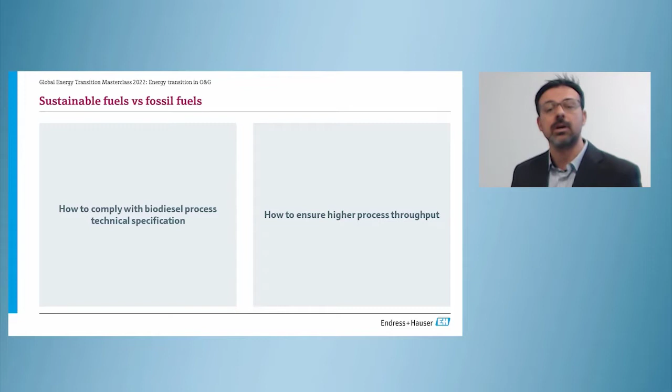Hello, Janish. Today we would like to discuss a very interesting case study, which is about isomerization process, but starting from edible oils and not from fossil fuels. More specifically, we would like to discuss how to comply with the technical specification of this isomerization process, and second, how to increase the process throughput.

I'm not alone, I'm together with Mr. Michele Pietroni, our industry manager for chemical and oil and gas at Endress+Hauser Group. Hello, Michele. Hello, Stefano. Thank you.

So, Stefano, as the expert for temperature measurement, how would you deal with applications used to produce sustainable fuels like biodiesel that apparently look like hydrocracking, which is used to produce fossil fuels? So, specifically, how would you meet requirements belonging to three main areas? Requirements regarding the reactor internals design, requirements regarding where the temperature must be detected, and requirements regarding the wetted materials, so materials which are used for the internals of the reactor. So how would you face these groups of requirements?

Interesting. Three very interesting points, but please let me better understand what is the difference between standard hydroprocessing or isomerization processes and this one coming from edible oils. Okay, so when I mean requirements regarding the design of the internals, you should know that the process temperature must be detected in a very small volume, which is between a quench box and a redistributor tray, which is full of small chimneys, which are equipped with two small holes each.

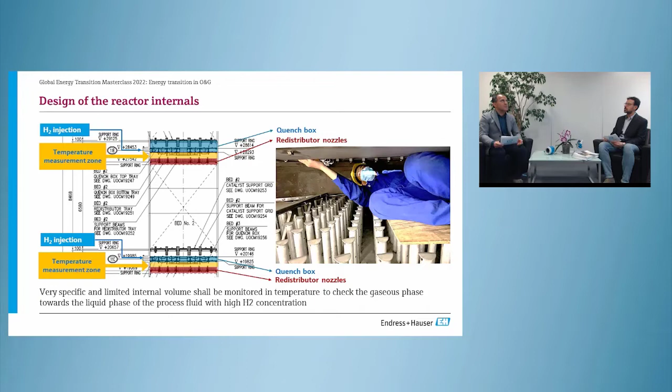So you should even know that in this volume, hydrogen is also injected in order to cool down the process fluid, carrying a mixture of two phases, the liquid phase and the gaseous phase. So basically in this volume you have two phases together in a small volume. Okay, and how do you deal with these two-phase fluids then?

So you should know that the liquid phase is kept under control, and the small holes are used to keep the liquid phase always at the same level, at a certain threshold. So basically, we have in this application to avoid that the fluid goes down from the top to the bottom of the redistributor tray. It means that the process fluid must not be sprayed as a liquid by the chimneys, but must be distributed as a gas.

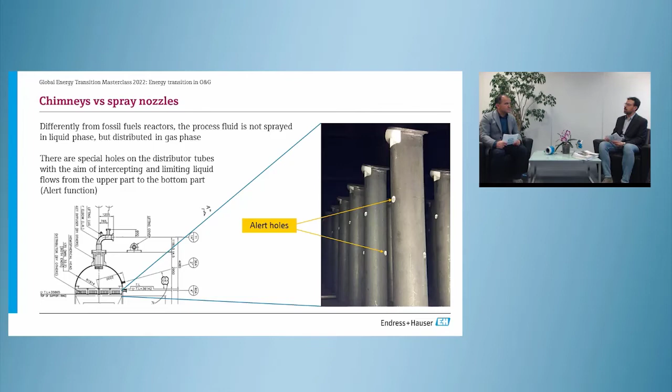And where do you measure the temperature then? Is it inside the catalyst or not? The catalyst has nothing to do with the temperature measurement. The main target is to detect temperature inside the small volume above the small chimneys, and the temperature must be detected there, and must be detected as a steady temperature, always at the same level, at the same value.

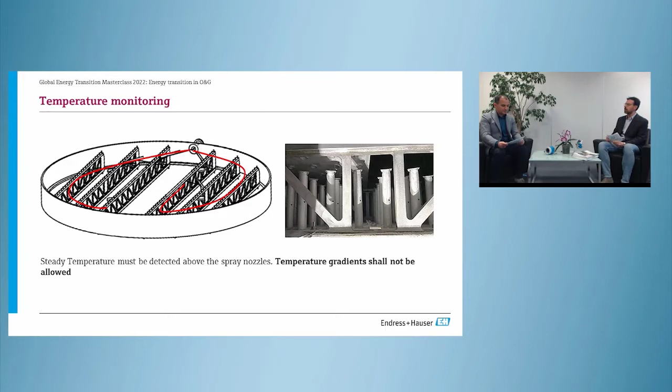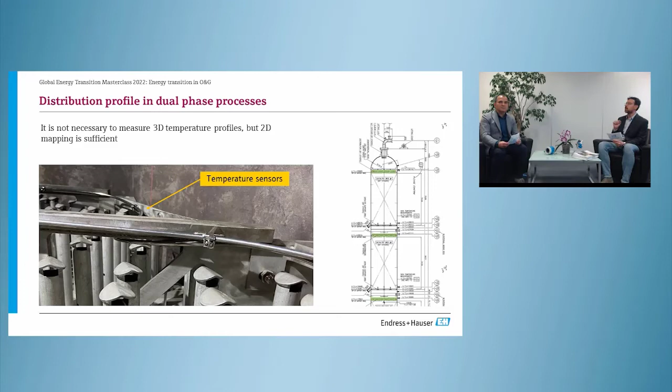That's interesting, and this reminds me of a very recent application we had with a customer. They were also interested in measuring the temperature just on the top level, close to these chimneys, and not inside the catalyst. So in a two-dimensional way and not in a three-dimensional way. So very interesting this case, and was the temperature the only parameter the customer was interested in?

No, it was not the only one. They were also interested in measuring the pressure, and that's because by acting on temperature and pressure, they could change the stoichiometric parameters and therefore influence the process efficiency.

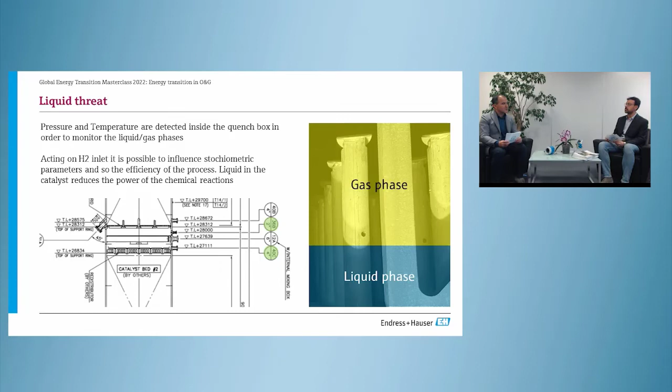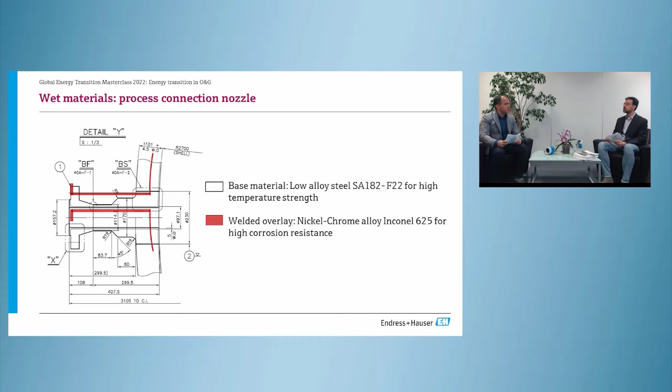Okay. So coming back now to the third group of special requirements. What about the materials? From the drawings, I see that the reactor materials are overlaid by alloy 625, which is a very high corrosion resistance alloy. So may we comply with these special alloy characteristics? Absolutely. We can provide the thermometers with stainless steel materials, which are for us common materials, but also different materials like alloy 625, more exotic, but also more resistant when it comes to corrosion.

Okay. So I think we have analyzed all the three basic requirements on this application: the design of the internals, where to detect temperature, and how to comply with the special materials. And how would you sum up the solution in terms of temperature measurements for these kinds of applications? I would say that we can for sure meet the requirements of these new processes, and also that the materials are for sure not an issue.

And I would also like to take this opportunity to remind that when it comes to safety of the processes, we can also provide thermometers with diagnostic features. And we have a long experience in installation and commissioning to install our instruments in the proper way. And last but not least, the long experience we have in the oil and gas and chemical industry will for sure support us in this transition phase of these processes.